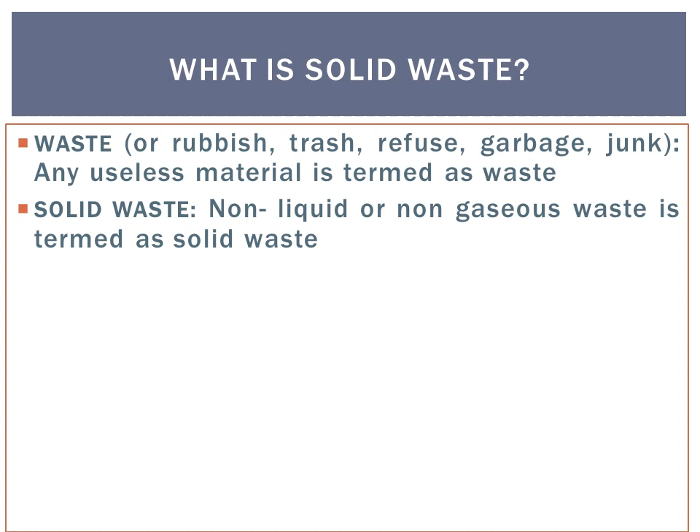Now that waste material may be of solid type, liquid or gaseous type, and non-liquid and non-gaseous waste is termed as solid waste. And such type of waste can be generated from houses, and then this is termed as household waste or domestic waste, may be produced from industries, from agricultural activities, from healthcare activities, from demolition or construction activities, etc. And mostly the solid waste comprises of substances from simple to complex or hazardous consistencies.

Now the classification of the waste on the basis of degradability. First one are biodegradable waste. Biodegradable waste are those materials which can be easily degraded by the microorganisms either in the aerobic or anaerobic conditions to simple substances, and mostly the organic waste materials are biodegradable. Examples are paper, wood, fruit waste, etc.

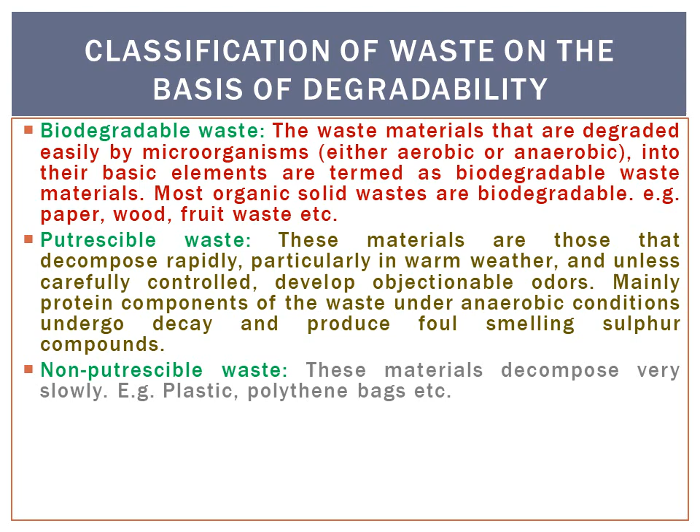Next are putrescible waste. Putrescible waste are those materials which are mainly comprised of proteins, and the microorganisms can degrade those waste materials in the absence of air in warm weather and produce foul smelling compounds, and these foul smelling compounds are sulfur compounds like hydrogen sulfide, mercaptans, etc. And next are non-putrescible waste. These materials decompose very slowly, like plastic, polythene bags, etc.

Next is leachate. It comprises of the liquids which are produced after degradation or decomposition of the solid waste material, and mostly this liquid material is produced on the landfill sites, and that liquid material comprises of decomposed waste, water and microorganisms, and that liquid has a tendency to seep down in the earth, and in landfills it percolates through the soil and leads to surface and groundwater pollution.

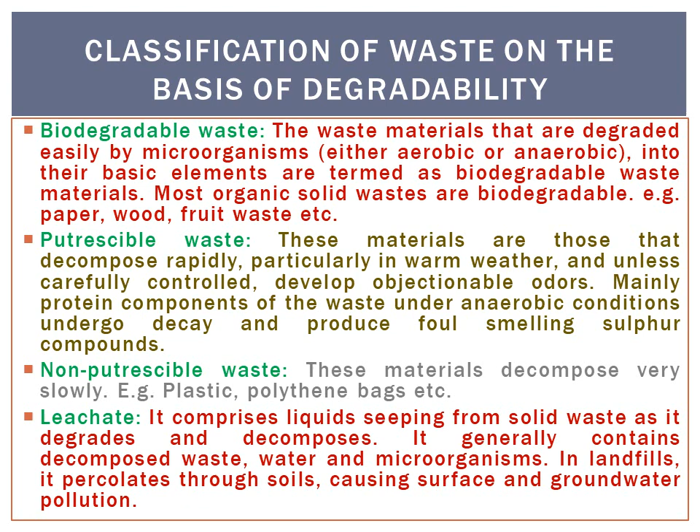Now the classification of the waste on the basis of origin. Solid waste can be divided broadly into three categories on the basis of their origin. First one is household waste or domestic waste, or this is also termed as municipal waste. Next is industrial waste, and industrial waste contains so many harmful chemicals, heavy metals, and so this is hazardous in nature. So this is also termed as hazardous waste. Next is biomedical waste or hospital waste, and such type of waste is also hazardous in nature because it can cause infections, so this is also termed as infectious waste.

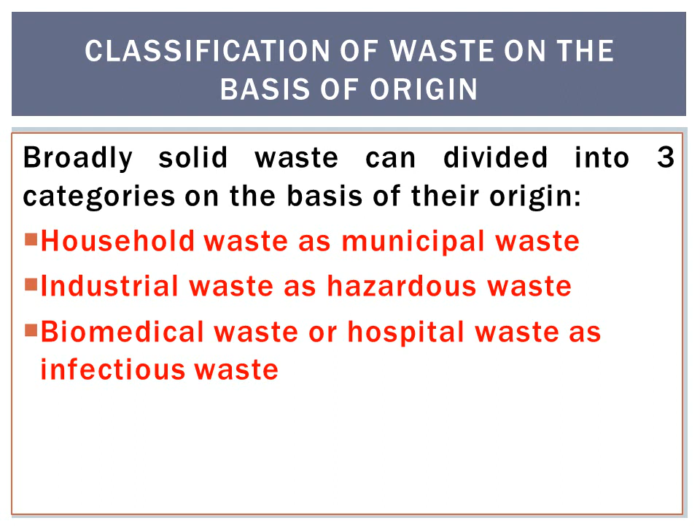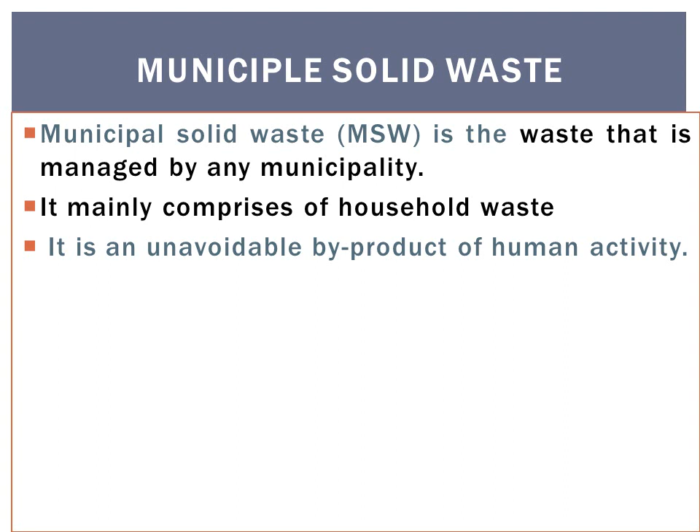Municipal solid waste is the waste that is managed by the municipality, and mainly it comprises of household waste or the waste that is generated by human activity, and that is actually unavoidable byproducts generated by human activities that are having no use. And due to rapid increase in population, urbanization, change in lifestyle and food habits, the amount of municipal solid waste generated has increased so much in the previous years.

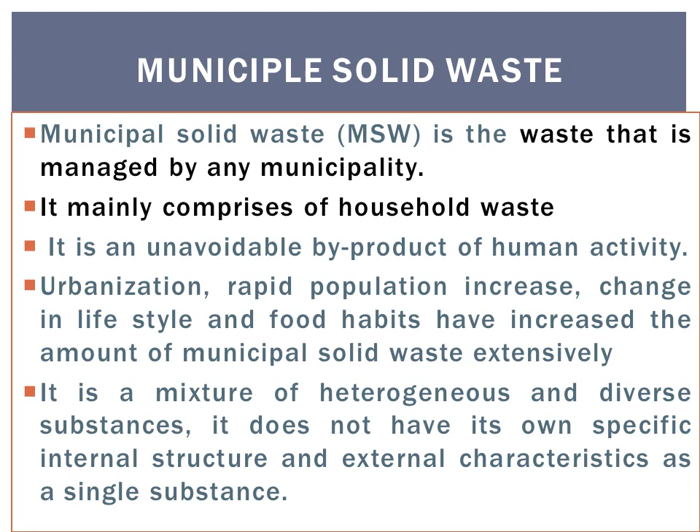And when we talk about its composition, it is a heterogeneous mixture of diverse kinds of substances, and it does not have any specific internal structure or external characteristics like that of a single substance.

Hazardous waste comprises of those substances which produce dangerous consequences to the environment as well as to the living organisms. And mainly under the category of hazardous waste there comes industrial waste, because industrial waste may contain harmful chemicals, and biomedical waste that may contain infectious organisms. Now, industrial and hospital waste contain toxic or hazardous substances that may be corrosive, inflammable or explosive, or may be infectious. So these may produce hazards in the environment and on the living organisms.

In the industrial sector, the major generators of hazardous waste are heavy metals, chemicals like pesticides, dyes, and rubber goods. Now, biomedical waste or hospital waste is the waste that is generated during healthcare activities, during the treatment of disease, during the diagnosis of disease, immunization of human beings or animals, or during research activities that are done using biological materials and all that.

The waste materials generated by these activities may contain sharp materials, pathogenic waste, pharmaceutical waste, genotoxic waste, chemical waste, or radioactive waste. And all these kinds of waste produce hazardous effects on the living organisms. They produce toxic effects on humans, animals, as well as on plants.

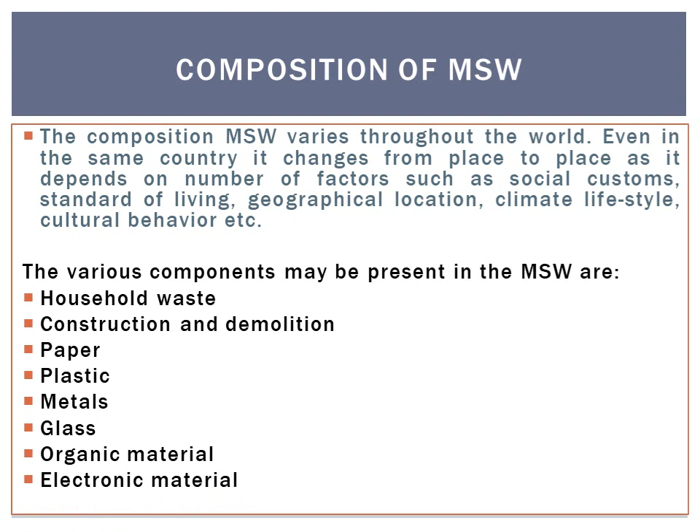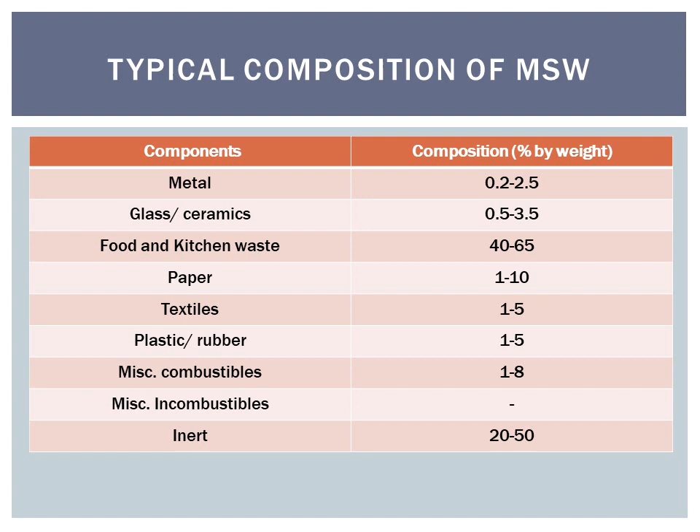Now, when we talk about India, then the typical composition of municipal solid waste is here. Metal component generally present by weight 0.2 to 2.5%, glass and ceramics 0.5 to 3.5%, food and kitchen waste 40 to 65%, paper 1 to 10%, textiles 1 to 5%, plastic, rubber 1 to 5%, miscellaneous combustibles 1 to 8%, incombustibles nil, and inert substances 20 to 50%. So this is the typical composition of municipal solid waste in India.

Physical properties of waste. Physical properties refers to physical composition of the solid waste. These include determining the percent contents of the various components which are present in the solid waste. These components vary with the location, season, storage time of the waste. These are very much important to determine because these help in the selection and operation of the treatment facilities and also in the design of disposal facilities.

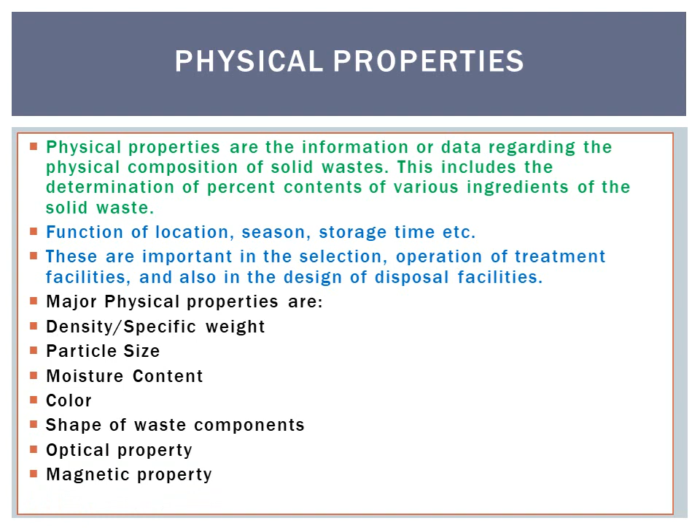Now the major physical properties are density or specific weight, particle size, moisture content, color, shape of the waste components, optical property, and magnetic property. Density or specific weight. Density can be defined as mass of the waste per unit volume, and it may be expressed in kilogram per meter cube or pounds per feet cube.

And density means compaction. More the density, more will be the compaction in the waste. Now initially the density of uncompacted waste is noted down, and later on efforts are done to increase the density, because more the density, more easy it will be to handle the waste, to store the waste, or to treat the waste.

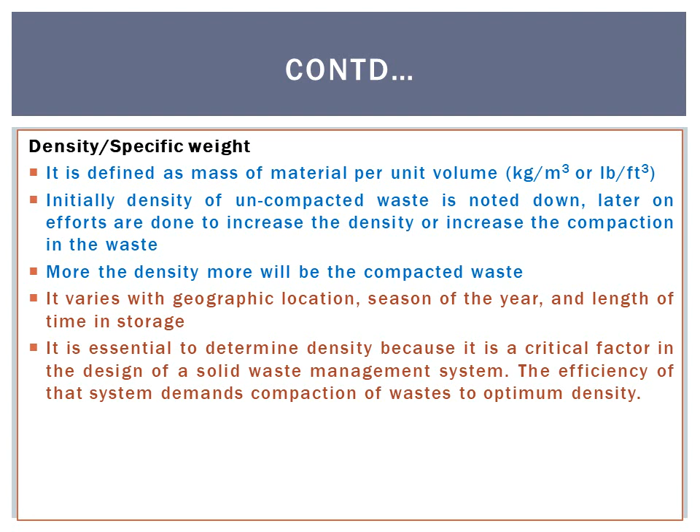And the density of the waste varies with geographic location, season of the year, length of the time in storage. And it is essential to determine density because it is a critical factor. It affects the design of solid waste management system. The efficiency of the system that treats the waste depends upon the compaction of the waste. That treatment system requires an optimum density of the waste, then only it can efficiently treat that waste.

The density of the waste affects the design of the sanitary landfills, storage of waste, type of collection and transport vehicles for waste. Thus, density not only affects the treatment systems but also affects the storage as well as the transport of the waste. And normally the compaction equipments reduce the volume of the waste by 75%. That means they increase the density of the waste 4 times before the treatment.

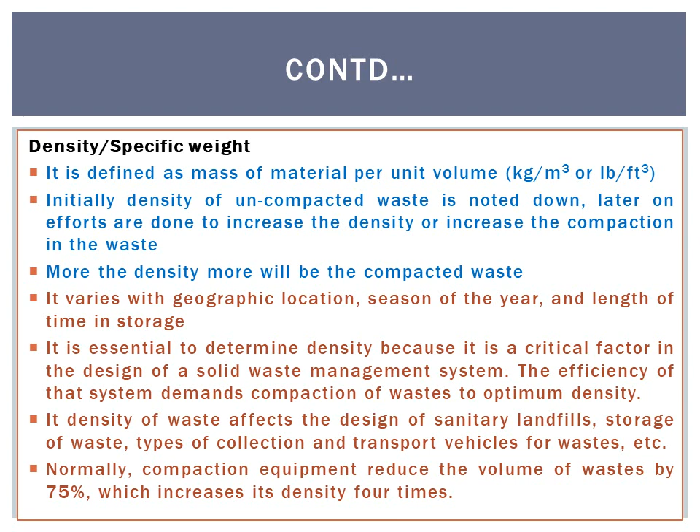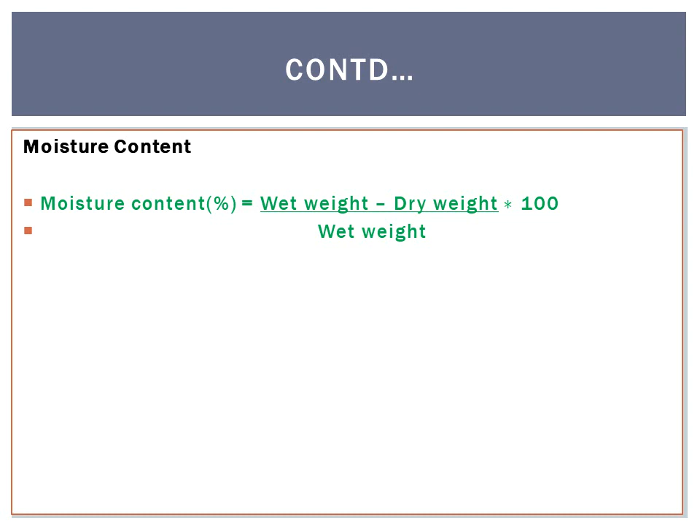Now the next physical property is moisture content, and moisture content of the waste can be calculated by subtracting the dry weight of the waste from the wet weight, then divided by wet weight, multiplied by 100. Now more the moisture content in the waste, more will be the cost of collection and transport. So moisture content should be less.

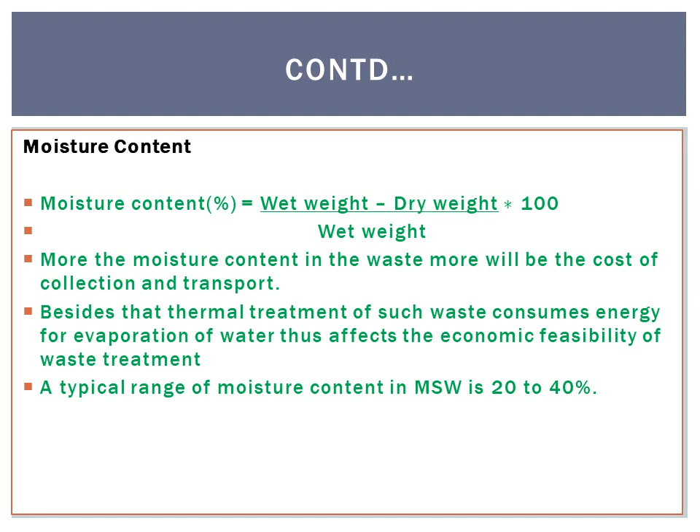And if waste has to be treated by any thermal treatment, then also to evaporate the moisture that is present in the waste, more and more energy will be consumed, and thus it can affect the economic feasibility of the waste treatment method. The typical range of moisture content that is present in municipal solid waste is 20 to 40%.

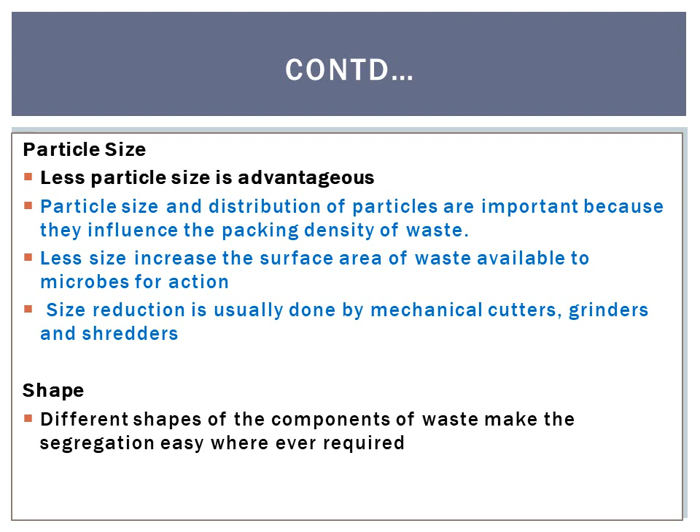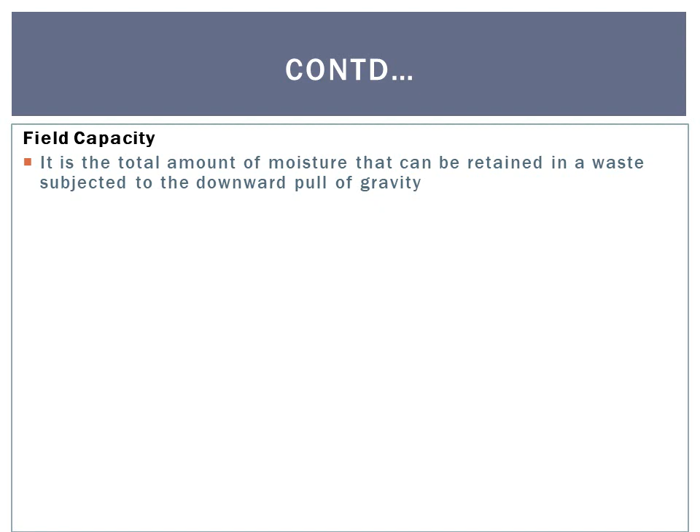Field capacity. When some waste is kept anywhere, then due to the pull of the gravity, moisture tries to move downwards, and more the field capacity of the waste, more will be the moisture retained by the waste. That factor is important in the case of landfills. In the landfills, when waste is kept for some time, then the liquid percolates downwards, and may enter the groundwater, and that is termed as leachate. More the field capacity, lesser will be the leachate formation.

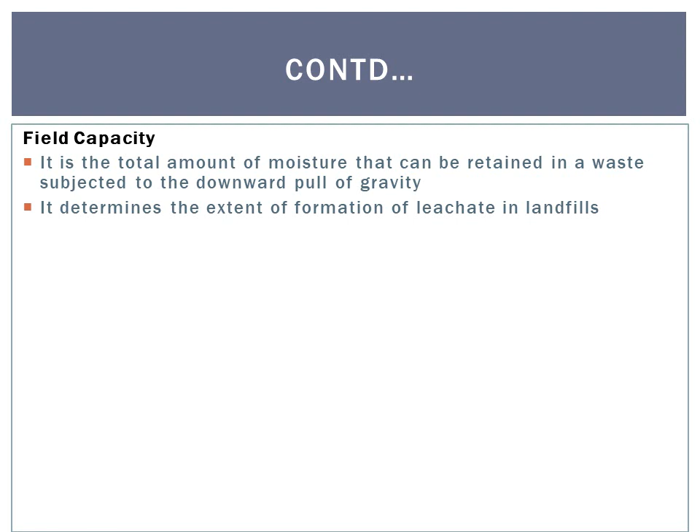Next factor is permeability. Permeability means the number of pores which are present in the waste, size of the pores which are present in the waste.

The greater the size and number of pores in the waste, the more movement of liquids and gases takes place downward when waste is kept at the landfill site.

Next is the optical property. Optical property means the waste may be of transparent type, opaque type, or translucent type. If waste materials have different optical properties, it is easy to separate out these materials from each other.

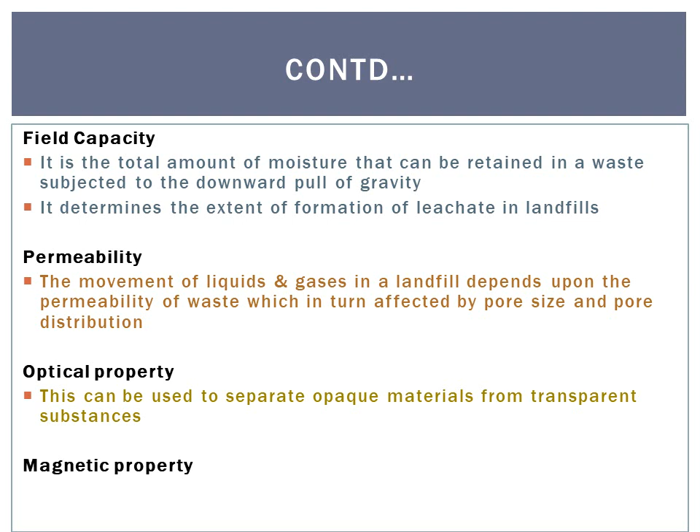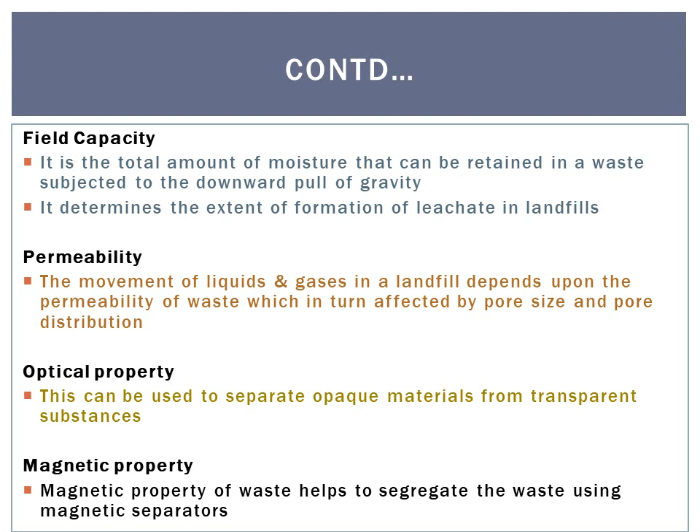Next is the magnetic property. Magnetic property is also important because if the components present in the waste have different magnetic properties, then it is easy to separate the different components by the use of magnetic separators.

Chemical properties of the waste. It is essential to determine the chemical properties of the waste to determine the behavior of the waste when it moves through the waste management system. Besides that, to know how solid waste can be used efficiently as a fuel or for any other purpose, it is also essential to determine the chemical properties.

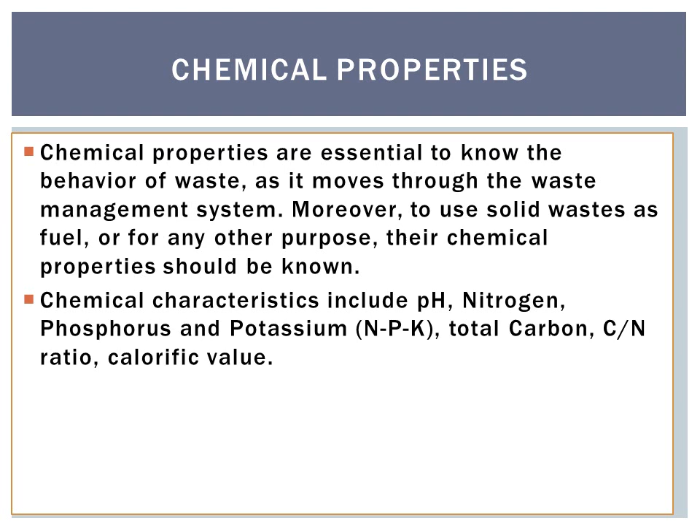The chemical properties include the pH, elemental content like nitrogen, phosphorus, potassium, total carbon to nitrogen ratio and calorific value of the waste. And biochemical characteristics include carbohydrates, proteins, lipids, natural fibers present in the waste and the biodegradable content present in the waste.

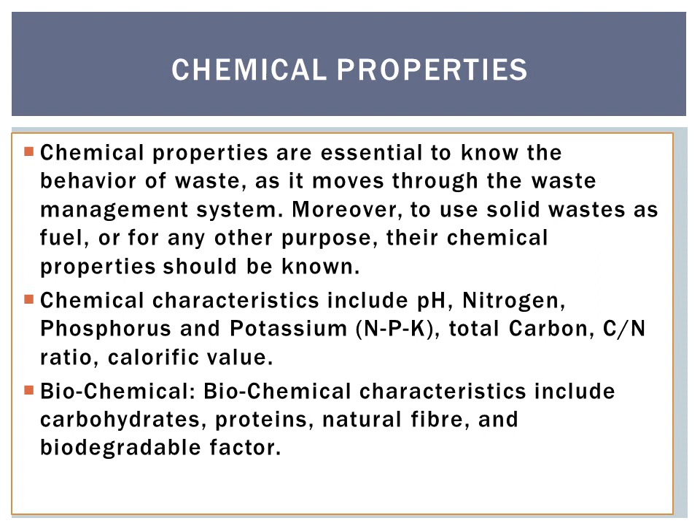Lipid, carbohydrate and protein content. Lipids are the compounds that include fats, oils and grease. Lipids generally have high calorific value. That means waste which contains high lipid content is suitable for energy recovery processes. And lipids are biodegradable, but their biodegradability is less because of their low solubility.

Next are carbohydrates. Carbohydrates are mostly found in food and yard waste. These include sugar and polymers of sugars such as starch, cellulose and all that. These are readily biodegradable and microorganisms decompose these carbohydrates to carbon dioxide, water and methane.

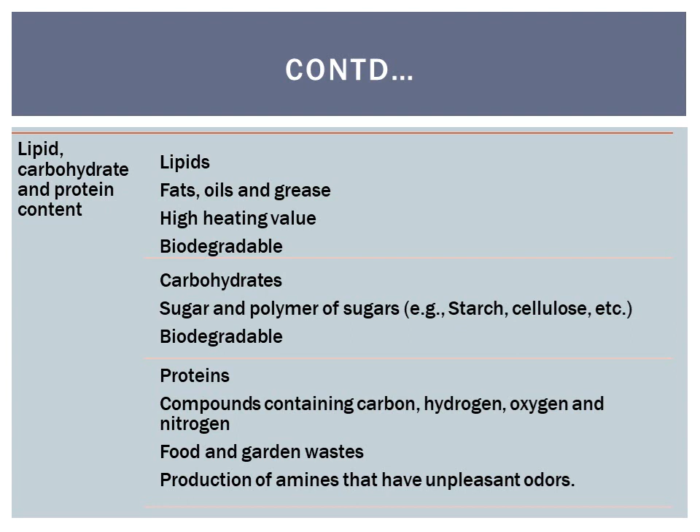Next are proteins. Proteins are compounds containing carbon, hydrogen, oxygen and nitrogen, and generally they are added to the waste from food and garden waste. These protein contents are putrescible, and when microorganisms degrade those proteins they produce foul smelling compounds, sulfur compounds like mercaptans and hydrogen sulfide, and also amines, and they attract flies and also help in the transmission of diseases.

Now paper, plastic and ultimate elemental composition. Paper products along with food and yard waste add fiber to the waste, and that fiber is generally resistant to biodegradation. That content is highly combustible and therefore suitable for incineration. Next are plastics. Plastics are highly resistant to biodegradation. They have high heating value and are also suitable for incineration.

Next is elemental composition, that is, to determine the percent carbon, hydrogen, oxygen, nitrogen, phosphorus, potassium, sulfur and ash in the waste. Halogens are also determined. This elemental composition helps to determine the carbon to nitrogen ratio present in the waste, and these contents are important for biological conversion processes.

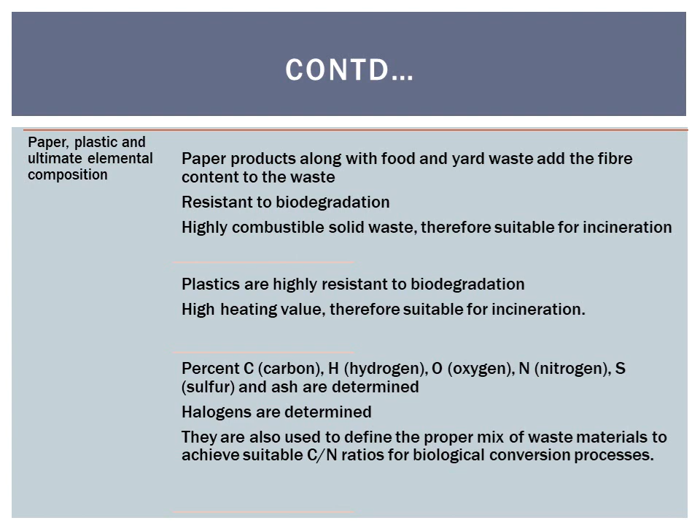Biological properties of waste. Biological properties means determining how much of the content present in the waste is biodegradable. Mostly the organic content present in the waste is biodegradable. That means microorganisms can act on them and produce gases and simpler inert substances by decomposing those contents.

The rate at which various components present in the waste are degraded varies markedly, and therefore, depending upon the degradability, the different components of municipal solid waste have been classified mainly into two categories: rapidly decomposable components and slowly decomposable components. It is very essential to determine how much quantity there is of rapidly decomposable components and of slowly decomposable components.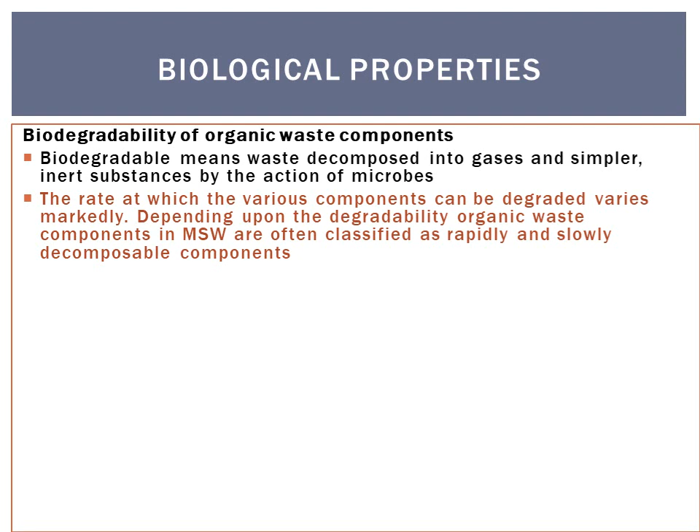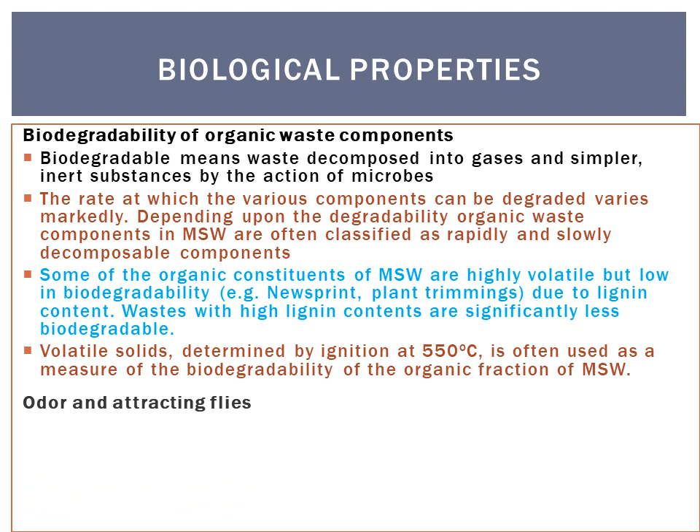Some of the organic constituents do not biodegrade, and such content is actually rich in lignin, such as newsprint, plant trimmings and all that. These contents volatilize but are not biodegraded by microorganisms. How much volatile solids are present in the waste is determined by igniting the waste at about 550 degrees Celsius.

Next factor is odor and attracting flies. Sometimes putrescible organic materials are also present in the waste. These are protein-rich substances, and microorganisms tend to degrade those compounds anaerobically and form foul smelling compounds like hydrogen sulfide, methyl mercaptans and all that. That activity attracts flies and thus plays a role in the transmission of diseases.

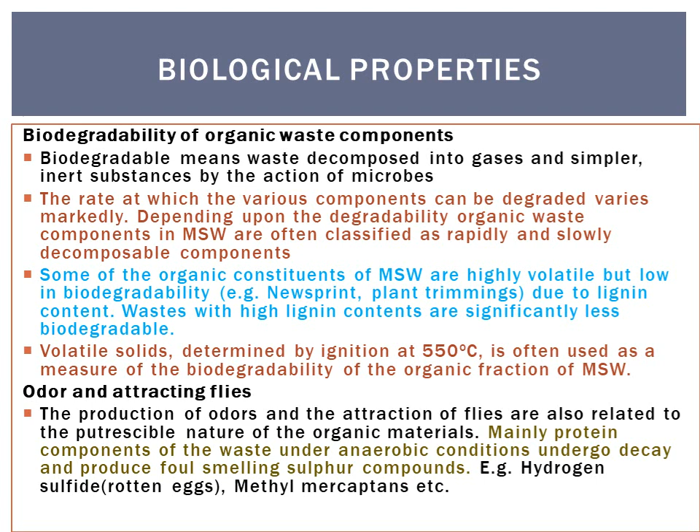Hello everyone, in this lecture I am going to talk about solid waste, its type, composition